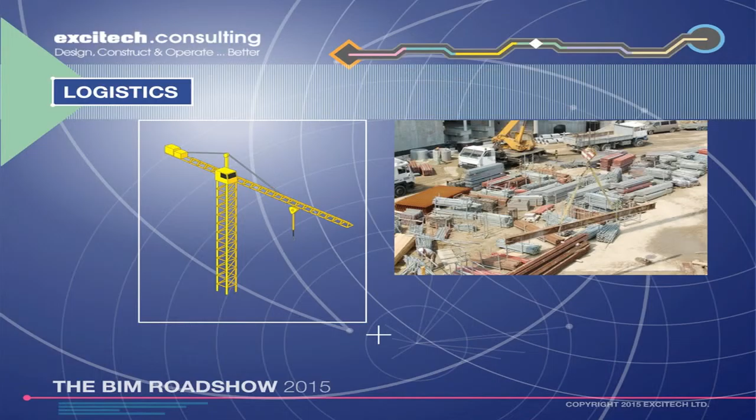And I don't know whether you saw this morning on the Google image, there's actually a lake now on the proposed site. Very nice in summer. We can take our sandwiches outside and things like that. But it proved to me a bit of difficulty, because what that's done for me is actually push my lay down area onto the other side of the site.

Whereas traditionally I'd have brought maybe a mobile crane on site to lift my materials into place, I've now got to install a tower crane. And that's so I can lift the materials over the reach of the lake and bring it back onto the site. So I've got to consider things like this. I've got to consider, is that lay down area big enough? Because if I'm doing off-site modular construction, it's going to need a lot more space than piles of steel just thrown and stacked up. So I've got to take all these things into consideration.

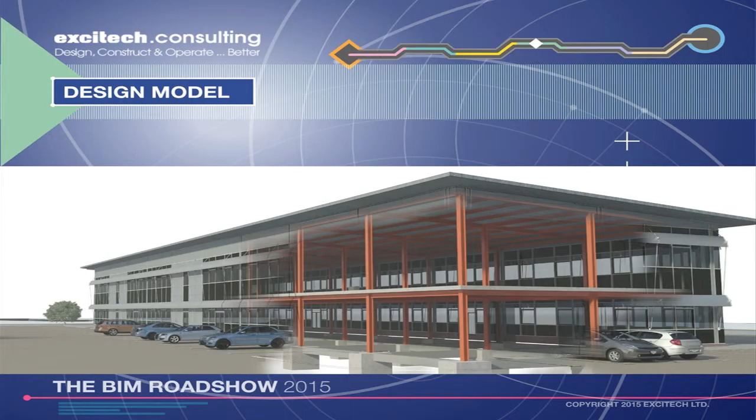But one great thing is I'm actually going to receive a design model. I'm not receiving that pack of A3 PDFs that takes me 2 weeks to try and understand what it's all meaning. I can start walking around this model. I can start getting a good understanding of what this model means to me. How we're going to build it, what's its construction, because some of the information's already started to come in. And I can reuse it for many things, and I'm just going to show you how it's going to help me deliver my bid.

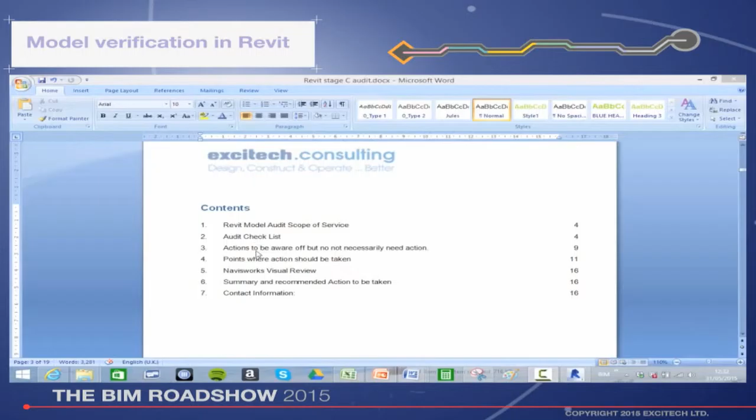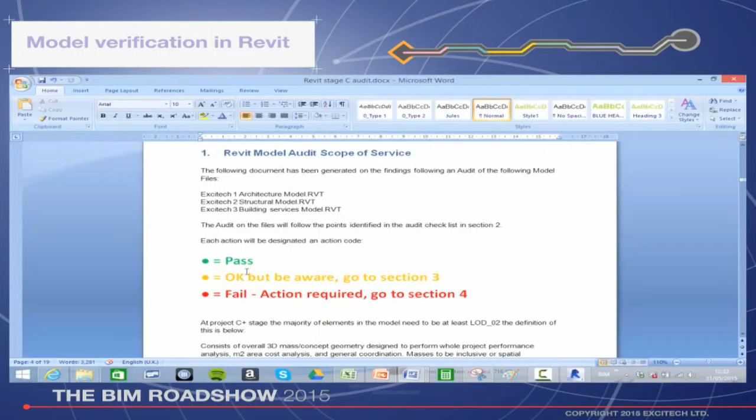But the first thing I've got to consider is the condition of that model. I don't know how well it's actually been modelled, put together, how the elements are put in. And I would do an audit, a full audit on that model as soon as I've received it. And this is even at bid stage. Because if that model has been put together in such a state that I've got to spend the first 2 weeks remodelling things, I've got to factor that into my bid.

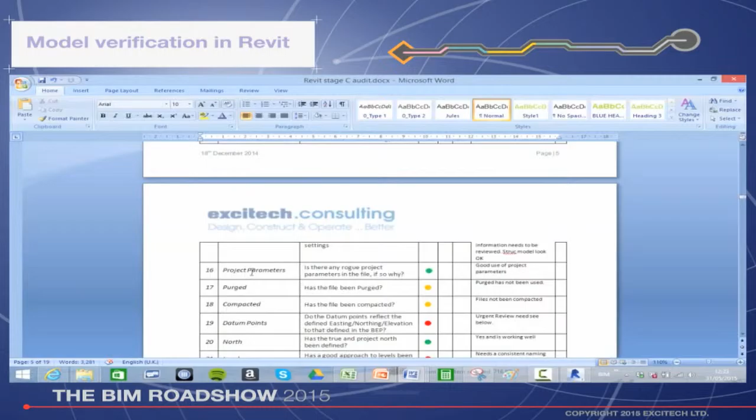If steel columns have been drawn in there from ground floor to the roof, it's not how I am going to procure them. So it'll have an impact if I take quantities off, if I put it into scheduling that I'm going to use, etc. And you can see here I'm using a quick, simple traffic light system to go through main elements of the model. Even things like are datum points correct? Because if they're not, it might look all right in Revit, but if I pull it into other platforms which I'm going to use, they could be splattered all over the place and wrong orientations and all sorts. So I need to consider these things.

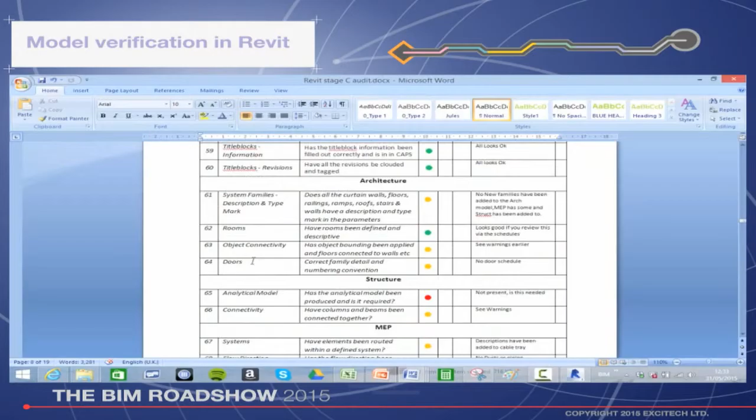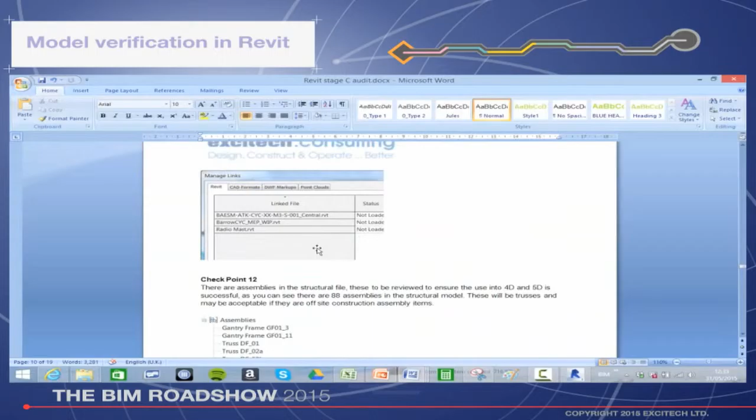So any contractors, who've we got as a contractor out here? Have we got a few? Brilliant. Let's hope I'm not bidding against you, but we'll keep going.

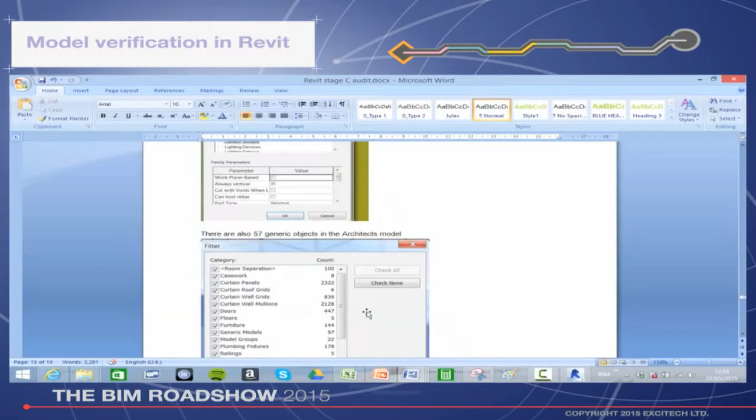Please look at auditing these models when you receive them. Don't just receive them and expect them all to be built the same. Every model's different and been put together differently. And tools and processes like this will help you during your bid processes and taking on work, especially during the construction phase, etc. What I'm showing here now is I've just moved into Revit.

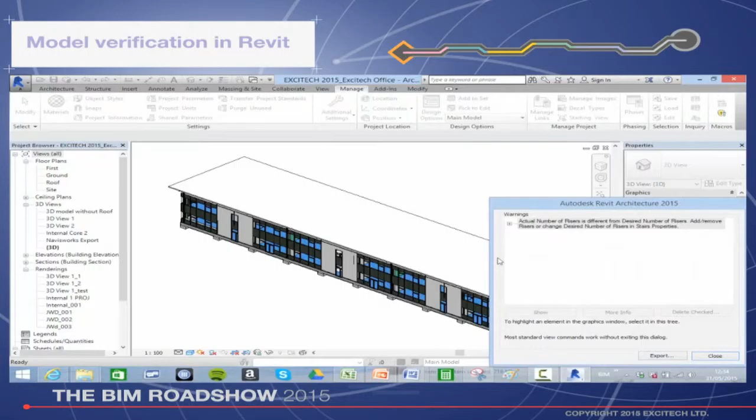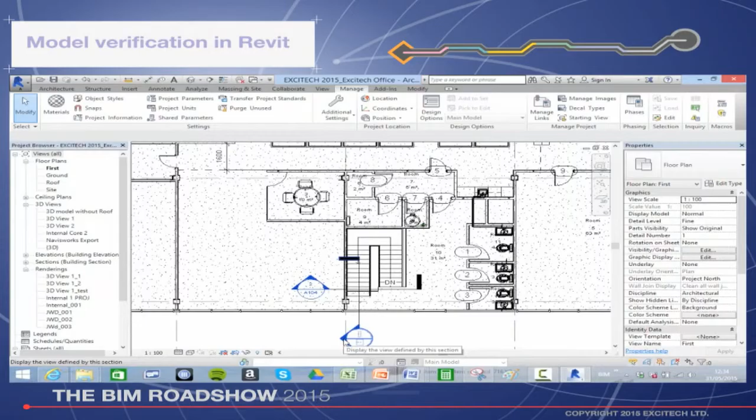Now this is free Revit. Don't know whether you know, but there's a free viewer within Revit. Install Revit, after 30 days it moves into free viewer and the save disables. Great, but what I've got here is allowing me to look at warnings in there, look at problems in that model that I wouldn't actually see. So you can see here the staircase is actually in the floor slab. I need to factor that. Either the architect needs to go back and amend his model because I'm not taking that on, or I need to go back to the client and say, look, you're going to have to put some additional costs in the bid because the model's not in a fit state that I need.

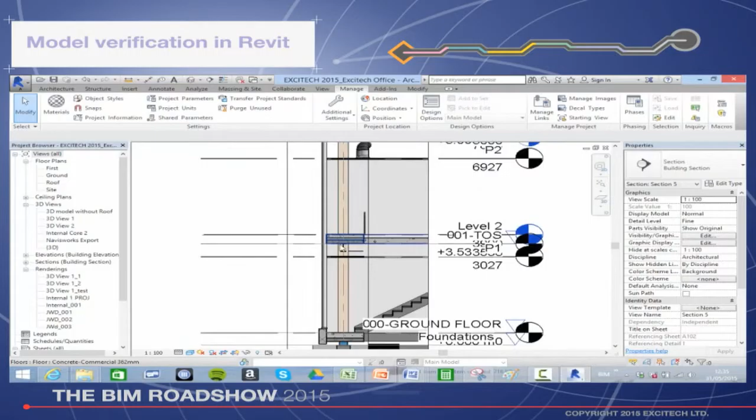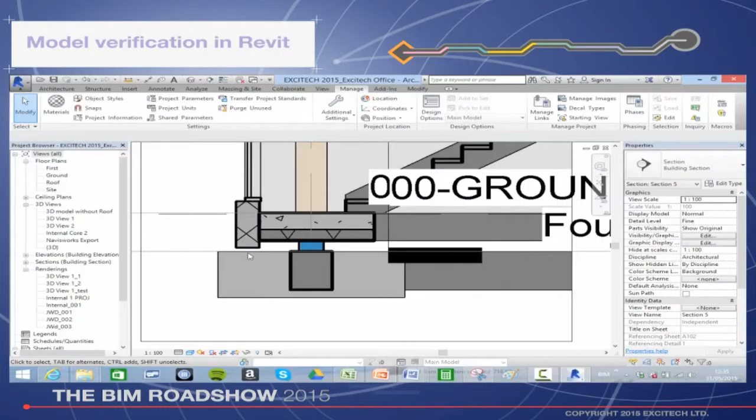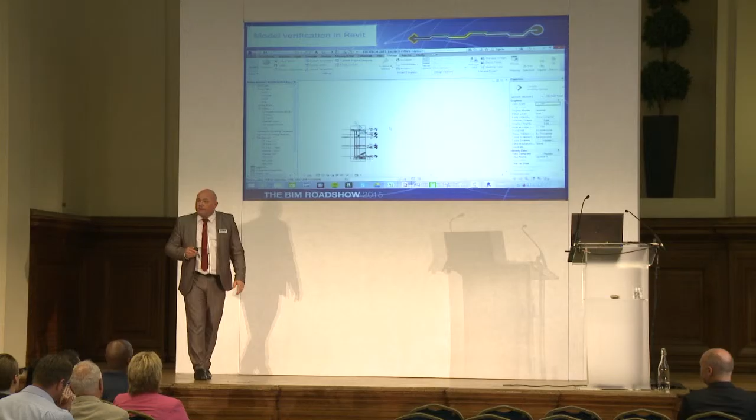I can start creating sections through the model. I can start looking at areas of that model that I wouldn't have any detail of in the past. Things that I'm not clear of, I would be flicking through these PDFs, finding information. I can't work out what that's done. Oh, I'll just put a nominal sum in there to cover that. I can find out that information. And that's key because it's going to help me reduce my costs and improve my delivery. And at the moment, I'm just auditing the geometry and bits of information.

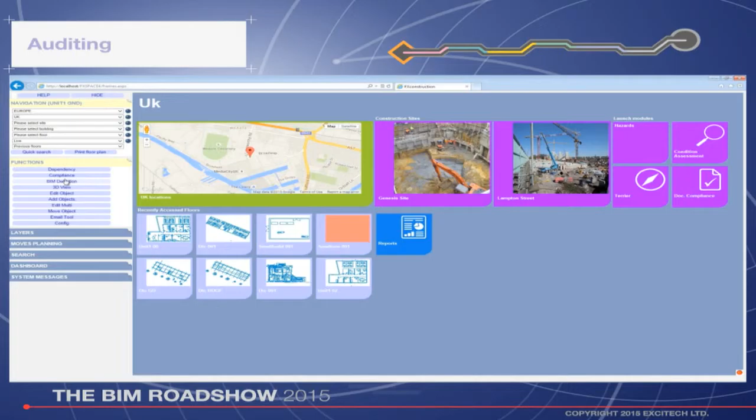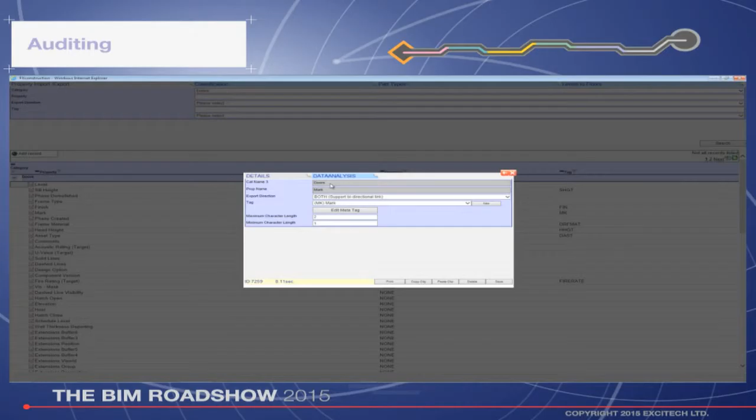Now, I know the client is using something called FXconstruction, so I've looked into that, and it'll actually strip out all the information from a model as well. So I can actually use this to audit the information behind that model. What's actually missing behind there? Not how it looks and how things have been put together, the actual information. The EIR is so specific that it's telling me what information needs to be against what elements and what needs to be against each space. And by using tools like this, it will list out all the information that I require and show me where the gaps are.

I can then go back and either cost for that, because I've got to do it now, or again go back to the architect and say, you implemented an MET, a model element table. You said you were going to fill all this information in for me. You've not done any of it. I'm not receiving this model again. Go and fill it in, and then I'll consider taking it on if I'm appointed.

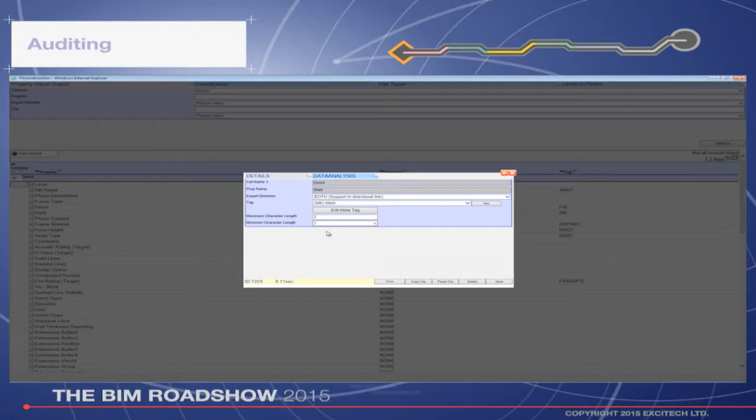So don't think about models as just being geometry and auditing geometry. Look at tools that you can audit the information behind it as well. Because you've got to deliver this at the end as a contractor. And if it's not there, you've got to put that into your bid, into your cost to actually deliver it to meet that employer's information requirements that's been truly defined for you.

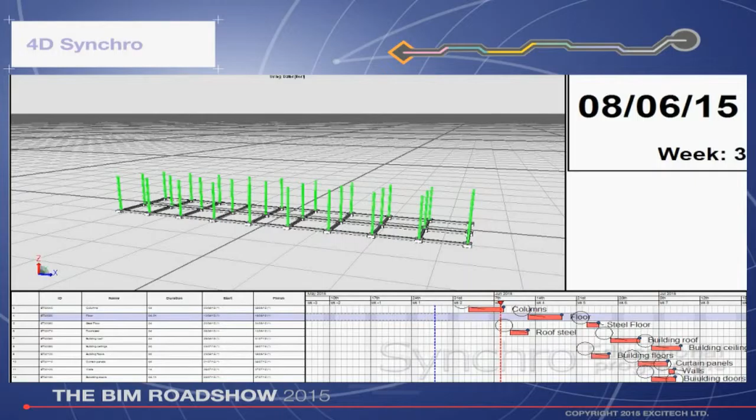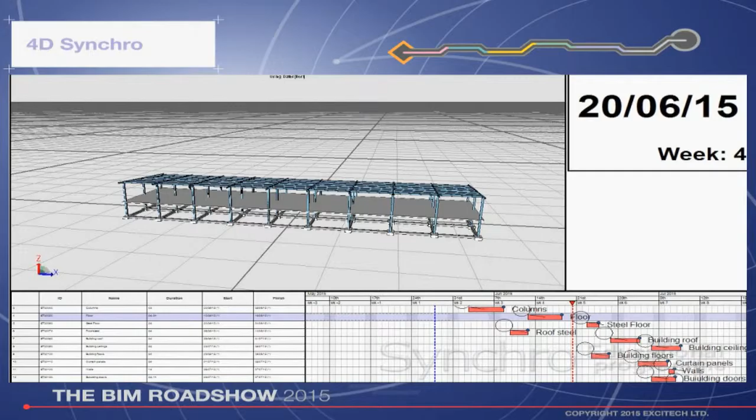Now, we know we've got a tight time scale, 6 months or something like that. Now, this is 4D construction sequencing. What this is actually doing is linking the construction plan, the Gantt chart, with the actual model. This probably took 3 or 4 hours or something like that to do, so it's not a long process. It's just reusing the data again.

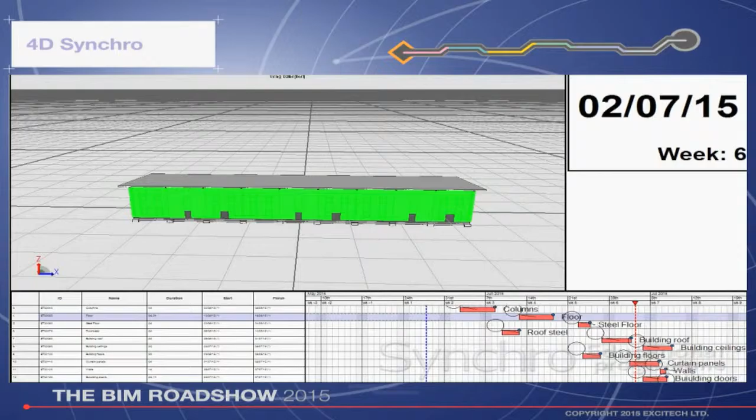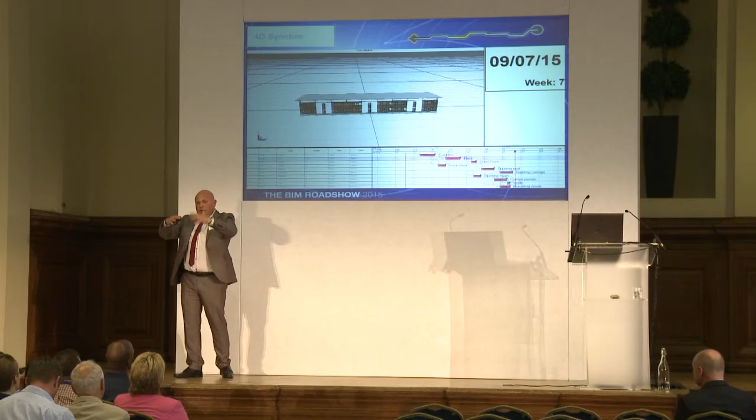All it is is using the Gantt chart that's been produced by my planners, but traditionally, the build of that building was up here in the planner's head. Me as a contracting manager, or the client, couldn't actually get a real good idea of how it was actually going to be built. This is doing that for them now. So this is giving true visual impact and early engagement again to the client, and that's something that we wanted. But it's given me certainty that I can actually deliver this on time, to cost, and meet the requirements. Okay, so great tool. That's Synchro, by the way.

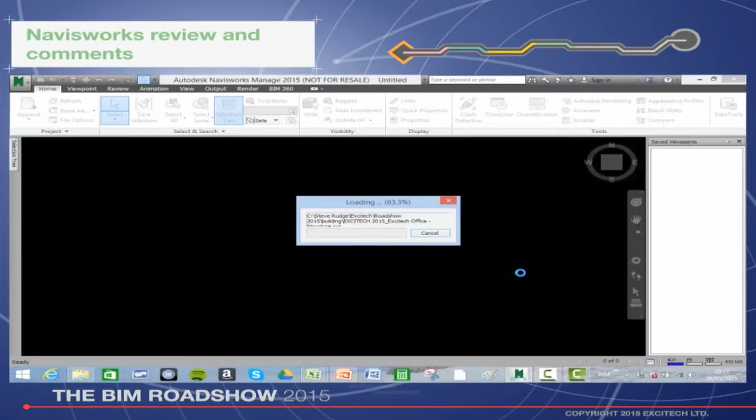Right, one thing I do need to consider is the model. Now, I'm a contractor, so I'm not going to be using Revit. I need to federate these models together, and I'm using here something called Navisworks. Navisworks will read any file format out there in the market and bring it into a platform. Now, what you can see here is what a client could see as well. He can walk around that model. He can start viewing and getting visual early impact of that model.

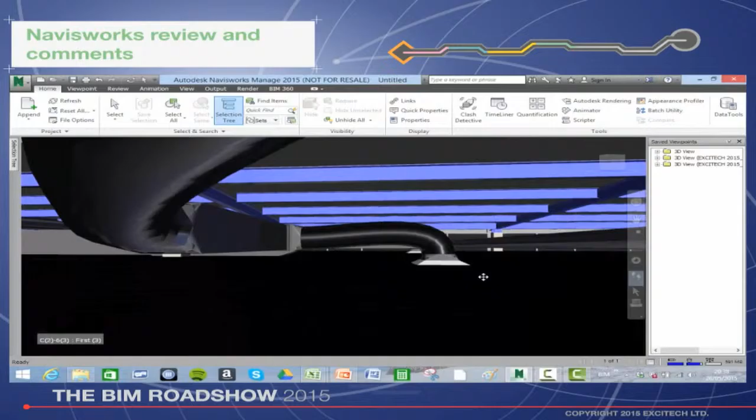What doesn't he agree with? What doesn't he like? We can look at how the services are sat in that void above the ceiling. We can actually drop through and start walking around the virtual built model of his offices. He can start looking at decor. He can start looking at furniture layouts. And even down to the end of the office there, we've got the glass meeting room.

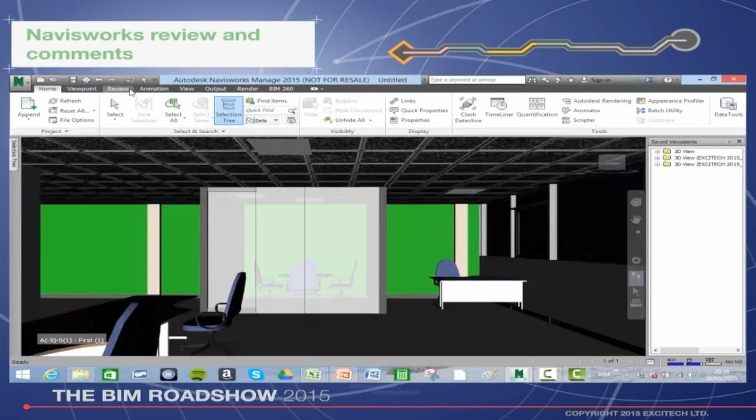What I don't want to happen is actually build that for him to come and walk around site and say, what's that? It's a greenhouse. I'm not having that as a meeting room. Take it down, rebuild it, blah, blah, blah. I've got to foot that cost, and I don't want to do that. So by my client and other people on the project walking around, we're finding problems virtually. We're not finding them once we've built and wasted materials, etc.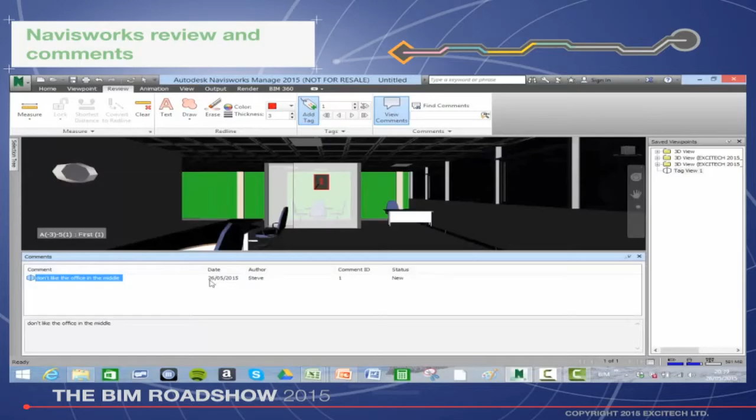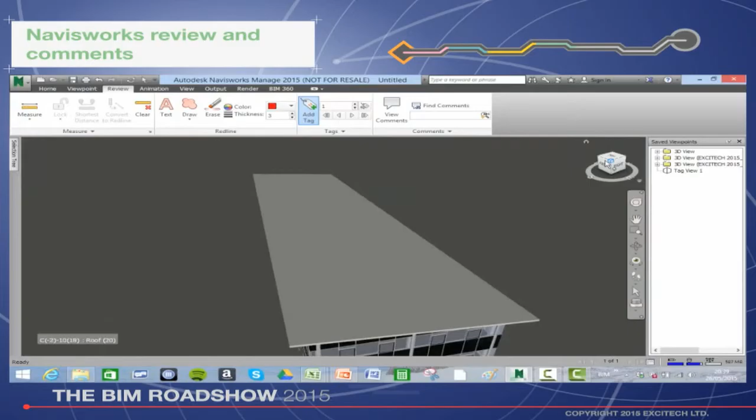We're resolving it. And what we're doing here is allowing the client and the whole team to actually mark up and review that information. So we're adding tags here, and this is fully auditable, so you can see who's actually made the comment. You can audit that and make sure it's resolved. As soon as I've done that, the architect can see it, the structural guys can see it. We can move those elements around. But more importantly, that client engagement's key.

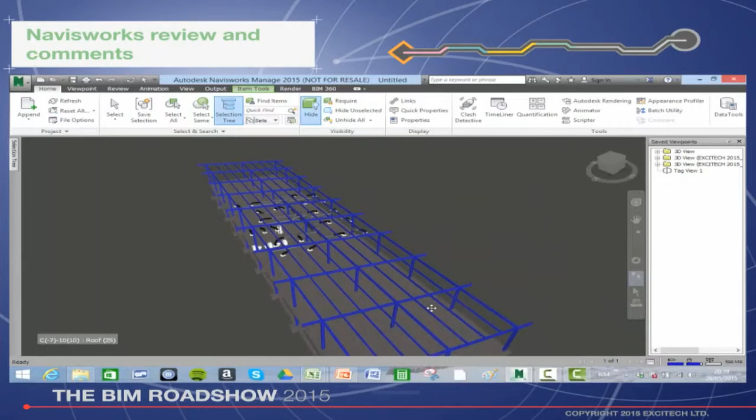Another thing I'm doing here is the client can actually just pick one model. I've actually here just switched off the whole of the architect's model, so we can start seeing the structural frame and the services within that building very, very easily. Something like that is information you would never, ever be able to see in the past. And he's actually able to walk around that as well and see comments. But I can do that as well.

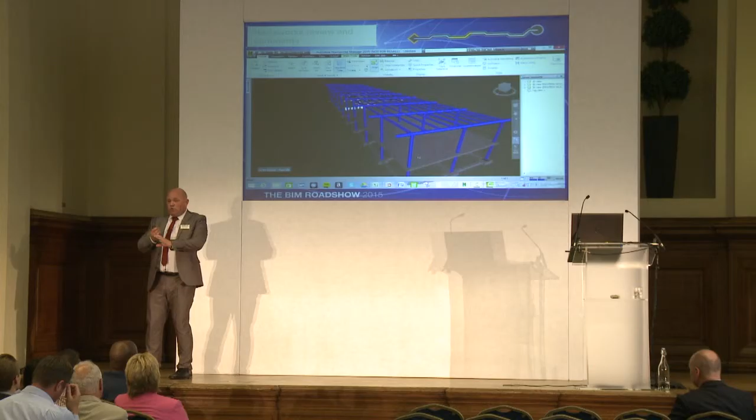So it's going to help me reduce my waste and problems, because I don't want problems on site. I'm up on my safety. I don't want any errors on site. And more importantly, I don't want waste. The other thing that's so important to me is clash detection. Now, this is a huge impact to me because this is really going to reduce my waste. And this is a clash matrix.

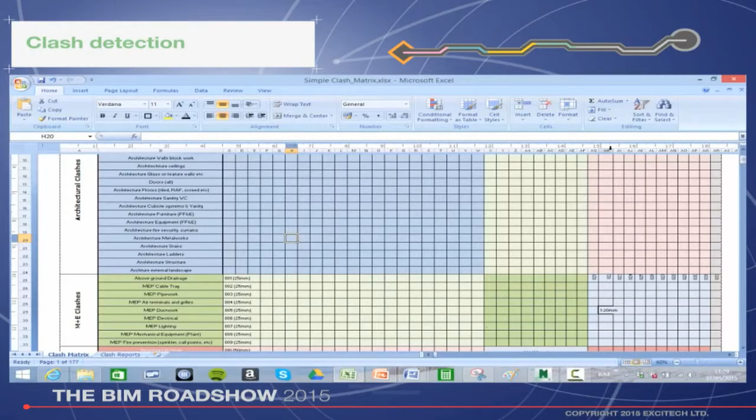What we've got here, on the columns you can see on your left, are all the elements in a model, and that's replicated across the top on a horizontal. Again, all the elements. All we do is pick one horizontal against one vertical and pull it together. There's the marker. This is clash number 1, and we'll put a tolerance on it.

Now, the tolerance I'm going to start with is probably 200 mil, because I want all the big problems sorted first. I don't want to start at 3 mil, because I'll end up with thousands of clashes, and I won't be able to resolve them. So start at 200 mil. And I've actually picked ducts against columns, so they're my 2 elements.

What I'm doing here is using something called a search set. It's allowing me to find all the columns in the building. The top there, columns, I'll select find all, and it just finds all the columns in that model. That's my first criteria. Against columns, I want to actually clash all the ducts. So I can do the same again.

I can save this one off first as columns. Now, anybody who's used Navisworks, if you're doing this, use search sets, not selection sets, because a search set will update as the model updates. If you use a selection set, it's rigid to the things you've just selected on that day. So you think you've got clash-free models and you forgot about the 20 new columns that have actually come in.

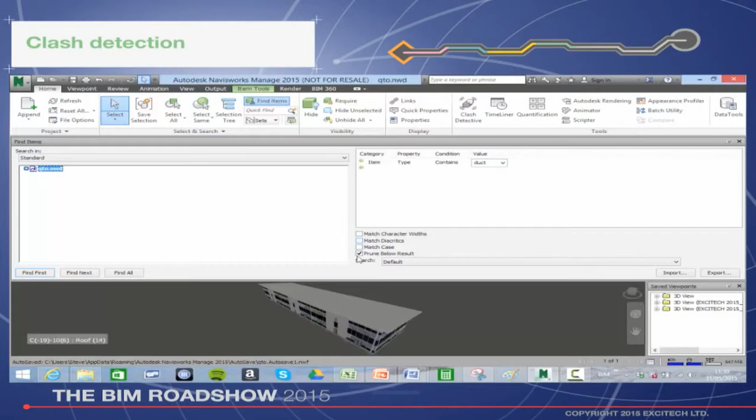So use search sets. So I'm doing the same again for the duct. Building that duct in, using the searches, finding them all, hiding off things that are not selected. There's all my ducts. So I've now got confidence that the model has been filtered to find just columns and ducts. So now what I need to do is save the columns away. So you can see there, columns and ducts, we're ready to go.

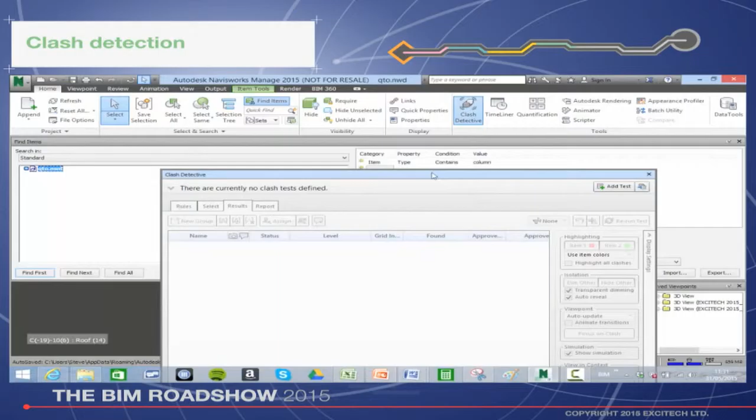Now what I need to do is run Clash Detective. Now this is in Navisworks Manage. And the Clash Detective here will actually run all these scenarios. So that clash matrix, you could start with 20, 30 different clash protocols going and gradually build up. I've got projects going at the moment. They've got like 350 different scenarios of things clashing against each other.

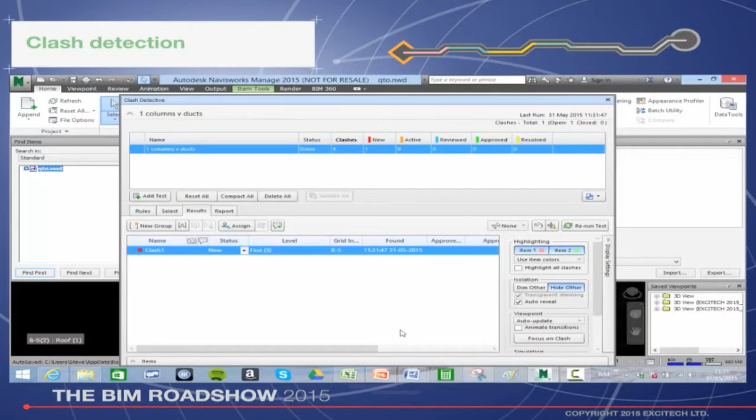And you can see now what I'm doing here is picking clash number 1, columns versus ducts, and I'm now going to pick the 2 search sets. And you can see search set number 1, there they are, columns, search set number 2, ducts. Tolerance, done, run it. Michael's done a great job, I've got 1 clash. Yeah, that'd be amazing, wouldn't it?

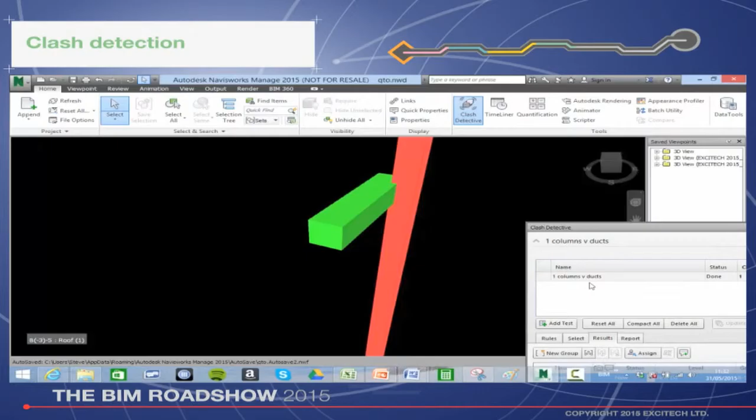There's the clash. Right, I can see it, I can visually see it, I can mark that up if need be. But most importantly, that can go straight back to the design team to resolve that error before I order any materials. So that's allowing me to get better cost certainty all the way through my delivery and hopefully reduce what I need to cater for and consider in my delivery and bid.

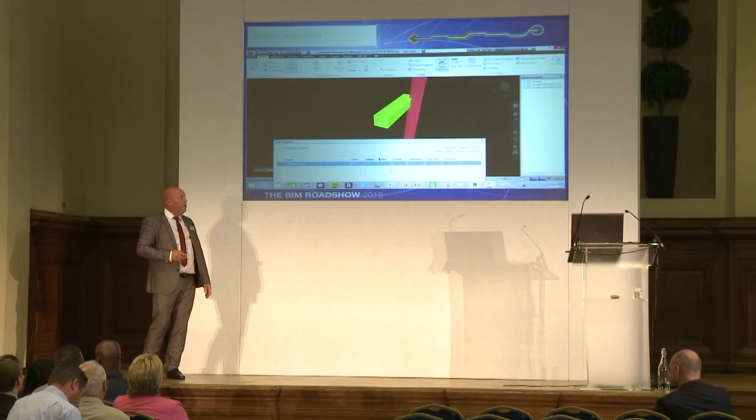Okay, so the other thing we need to consider is the quantities. Now, are there any QSs amongst you? One. Hello. We had a few in the other one, so I kept all my jokes quite minimal.

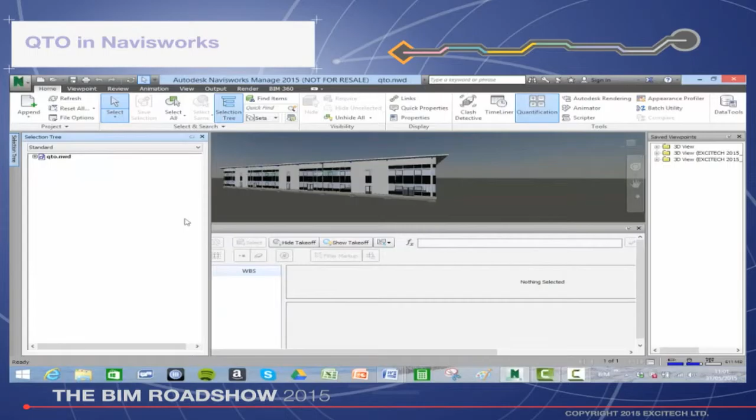So, quantity takeoff, yeah? What's great about quantity takeoff now is I'm pulling the whole model and just stripping it straight into a workbook. And what it's actually doing is filtering everything, because everything's intelligent now. It's not lines, arcs, circles, all put on layer 0 and everything's all blocked together. Things are actual objects. So it's a virtual build of this building. And it's actually filtered it into the specific naming and brought it over here.

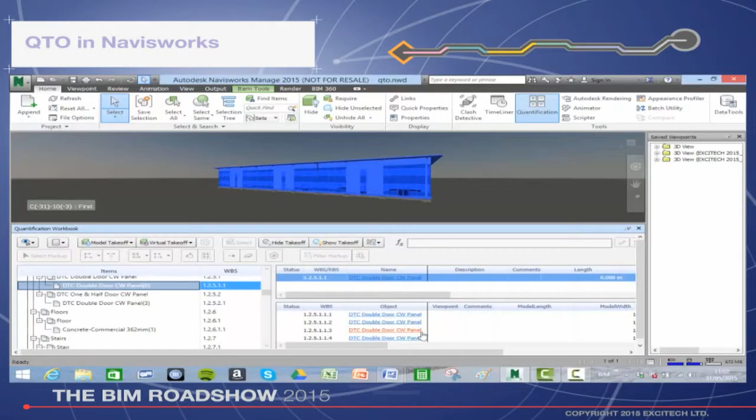So you can see each wall's defined, the length of the walls in there, and also the total of the walls in there. Now this can be stripped straight into Excel. So it's not taking the role of a QS, it's just making them more accurate and giving better cost certainty for myself when it comes through for costing. It's allowing me to capture that true data that's sat in that model.

So traditionally, it had been a PDF, highlighter pen, scale rule, and an Excel spreadsheet. And we've counted 50 doors. I probably need to order 53 just in case they've missed a few. I don't now, because hopefully we've captured it all. The model's checked by that many people, we'd have found problems if a room was there with no door to access it and things like that. So great tool, very easy to use.

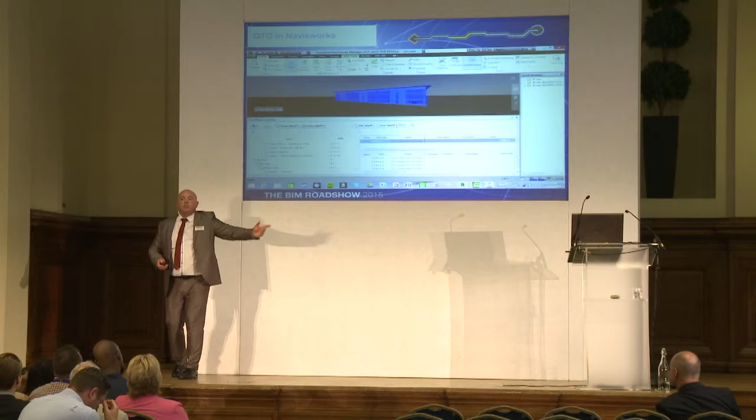But just think where it's going to. It's not going to do everything for you. Take the objects off, push it into Excel, and look at your traditional processes of estimating and bringing those costs together for delivery. What I'm showing here is, again, the free Revit viewer for a contractor, which is great because I don't design author, so I don't need it. And I'm producing another schedule in Revit, and this is a material takeoff schedule.

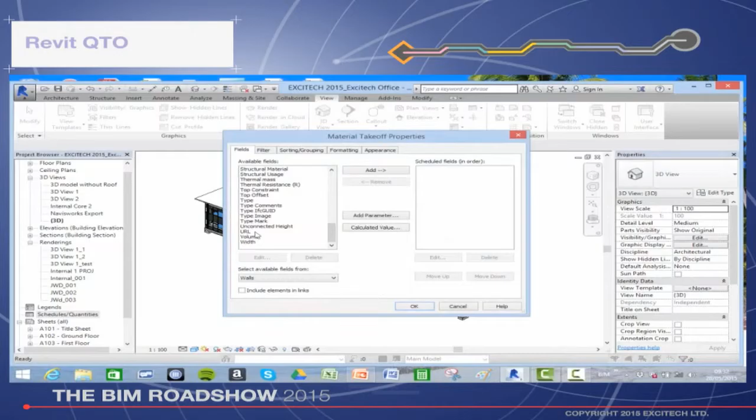Now, the QTO in Navisworks is pulling out a type of wall, which is, say, a basic wall, which is brick, cavity, block, plaster, paint, skirting, but it's just called a basic wall. What this is doing is stripping it into the materials that wall's made up of. And you can see here, it's probably quite hard to see, but it's actually broken it down into plasterboard, into some studded material, all the skirtings listed there, and we can sort that out, put a filter on it,

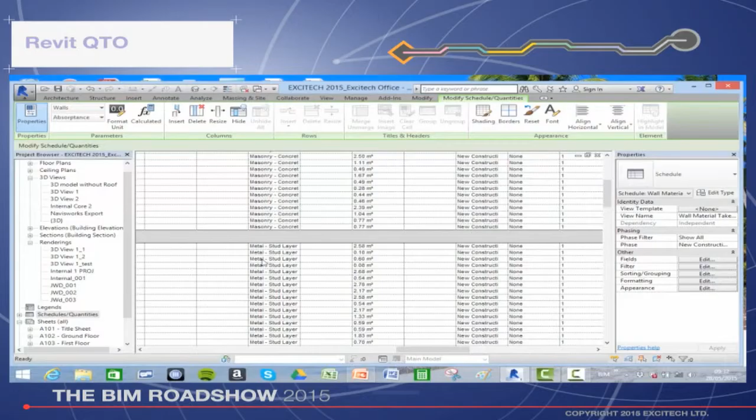and put grand totals in. So I'm not just looking at high-level walls now, I've actually got into the true materials that are being put in by the architect. So I've taken it down granularly to that next level, and I can use those 2 different bits of software. Hopefully they both add up the same, but it'll help the QSs and people like that to get more confident in using this technology.

Okay. So that's just a few of the tools that I'm going to use during my bid process to help me deliver a lower price to hopefully win this bid. But there's a few things I need to consider because I've got this EIR in place. And one thing I really need to look at, that EIR is specing that all the models need to be delivered in Revit. As we know, Revit's a great design tool, but push that into the subcontracting space, manufacturing space, it doesn't go to the detail for the

manufacture and fabrication. So what happens when I've got that steelwork connection, because traditionally it would have probably gone to my subcontractor and the connection plates would have been done in Tekla. I'd have gone to my MEP design team, great, done it in Revit MEP. Passes again to my subcontractor, what happens? They redo it in CADduct or Fabrication MEP.

So I've got to take into consideration how I'm going to capture all this information and how I'm going to get it back into that Revit model, or capture the information in other means and other ways to fulfill the requirements of my client, who wants data-rich models passed over into that FX360 CAFM system at the end.

And if you look at the asset information, you can see there's a list here. That list isn't in Revit at all. That's fabrication, that's manufacturer's information. Where do I capture that? How am I going to capture it? So I just need to factor that into my costs and my bid as well, just to make sure I've got it covered, because it's me that's got to deliver that to that client at the end of the day. And it's all about data. Yeah, BIM is data-rich modelling.

And there's one thing that we've not talked about all day yet, and that's COBie, Construction Operations Building Information Exchange. Why? Because we don't really need it on this project. We've got a client who's really defined his requirements. He's defined what information he needs to capture against spaces and against elements, and how that information is truly detailed. That's why we don't need COBie.

If the client came to me and said, we want BIM, we want level 2 BIM, blah, blah, blah, I'll have COBie because I don't know what I'm doing with it at the end. That's when COBie comes in. If you've not got a true defined delivery, you don't know what information needs to be collated, we don't know what CAFM system it's going into, COBie is a lowest common denominator, which is an Excel spreadsheet. And it strips out the information from the model and populates this Excel spreadsheet via IFC files and other formats.

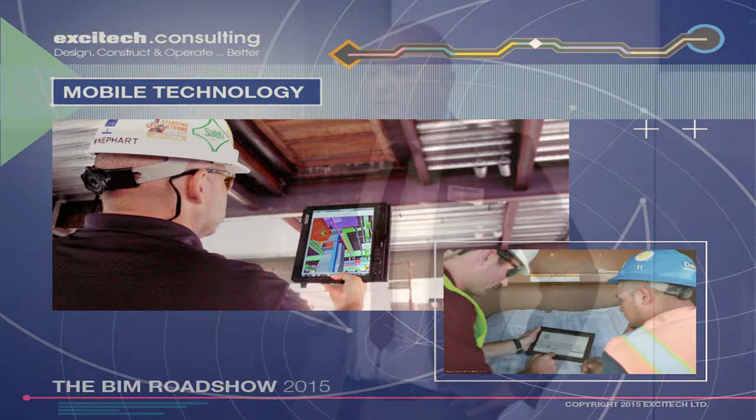Other things in my bid: I'm going to put in there that I'm going to actually use mobile media, mobile technology. And this is great, really, because I'm trying to move my whole team and my supply chain away from just using paper. I don't want to start rolling paper out on the concrete floor, getting all dust and everything else. I want to use the technology that I've already got at my fingertips and I can reuse again. And it's going to engage everybody in the project.

Now, we know the client wants early engagement. He can see the information that's being collated. He can see what data I'm collating against his assets at an early stage. If he's not getting the data he requires, he can tell me and I can adjust, rather than wait until the end, and I've got a huge job to collate different information that he wants.

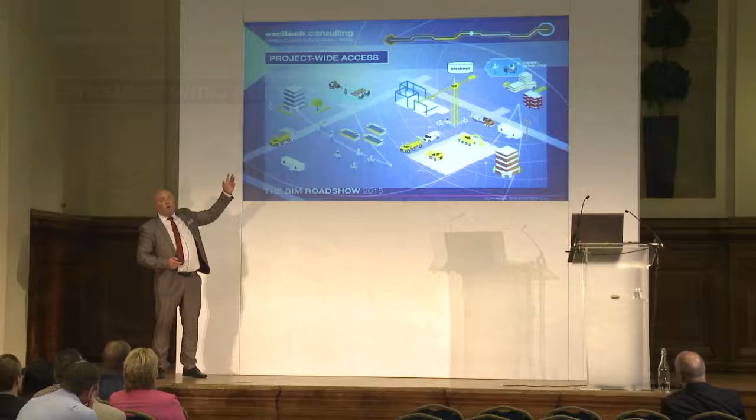It's also going to look at my construction management team, because they can see who's creating all these issues. They can see who's creating the snags on site, but actually who's not closing them out again. Who's causing all the problems? Because everything's recorded in this system and it's visual to everybody. Even the project managers can start seeing what's happening. So they can get early engagement and see if there's things that are going to actually impact on the delivery and delay what we're actually going to push out there.

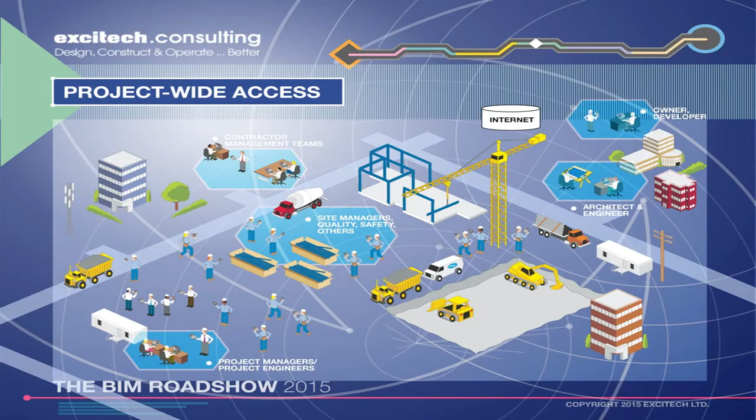And right the way through to the architect. So if there are things collated, problems, things not fitting, whatever, the architect can adjust the models very, very quickly before I get things procured or fabricated off-site. And even down to the site people. So the Field system will put in a QA procedure for me, which will tell me what things need to be done as I'm doing a task.

So if I'm installing a pump, I need to do these things before I commission that pump. So it's going to improve my health and safety and improve my quality on site. And that's really key because it's these guys that will be using it.

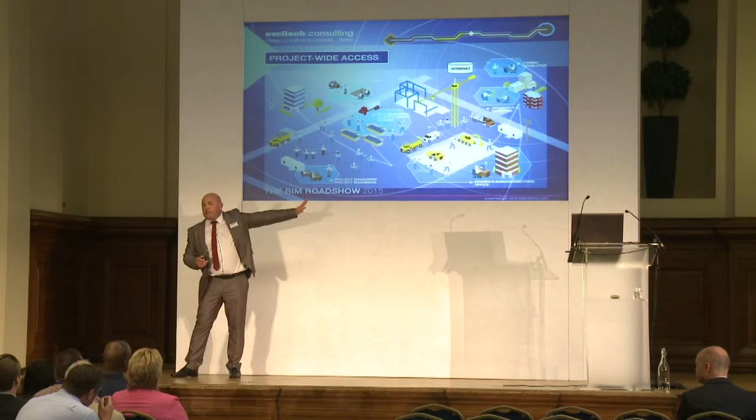Yeah, I worked on a job and actually the client used it as well, and he walked around site with the mobile technology and finding problems, and he was doing his own snagging while he was using this mobile media technology, which I thought was quite unique, but he got really involved in the project and he loved it. And it was just a key differentiator for him.

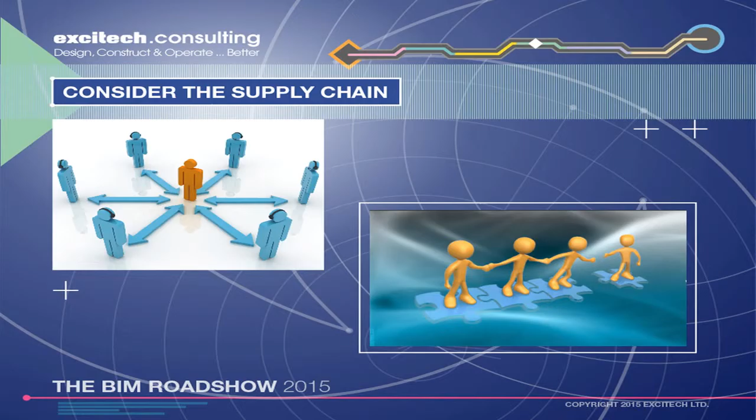So I do need to consider my supply chain. If it's broken and they don't provide me the information, I've still got to get it to the client somehow. So if I've got two bids of similar price and one's offering me 2D PDF only, and the others are saying, well, I'll model and give you data-rich information, I'll input it into Excel for you, blah, blah, blah, who am I going to go with?

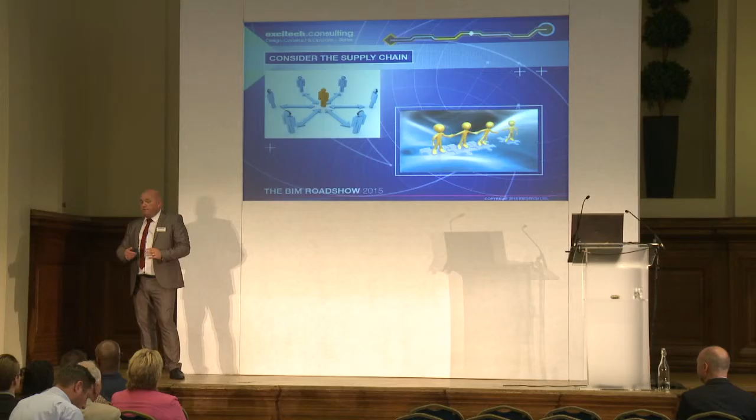So I've just got to consider that, because there's huge risk on me delivering the project but not meeting that EIR. And that's part of my bid, so hopefully, if I'm successful after lunch, we can have a look at some of that technology and some of the field systems that I'm going to implement.

Now, to finish off, I spotted in that EIR one thing, LOD 500. Anybody heard of it? Yeah? As-built verification. I have to deliver an as-built model at the end of my project to that client. Yeah? Great. Because what that means is I can't deliver my traditional drawings that I used to, because they weren't really as-built, they were for construction models, and there were a few little errors in them and things like that. I can't do that anymore. They want as-built models.

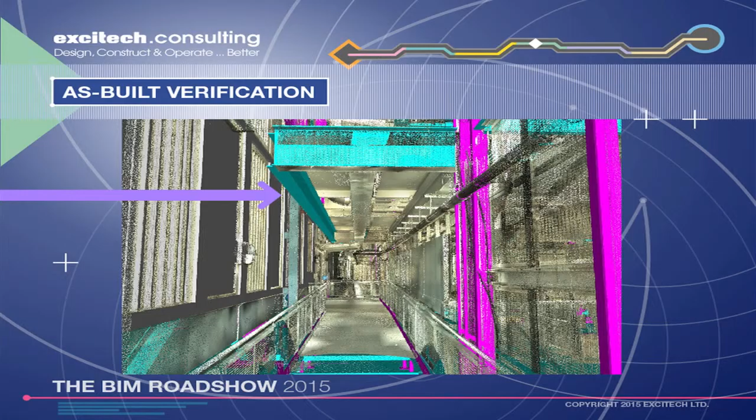And this image is really just an example. So you can see the beam here. That's the beam in the model. I've actually laser scanned it, point cloud scanned it. And are the guys from Plowman Craven around? Yeah, 2 guys there. If you want to know about this stuff, go and have a word with these guys at lunch. Great guys, and they'll tell you all about this.

But the point cloud is capturing that area. Yeah? And the beam is actually there. So I now need some form of process put in place to amend the model to move the beam into its correct location. That's when it becomes LOD 500 and true as-built.

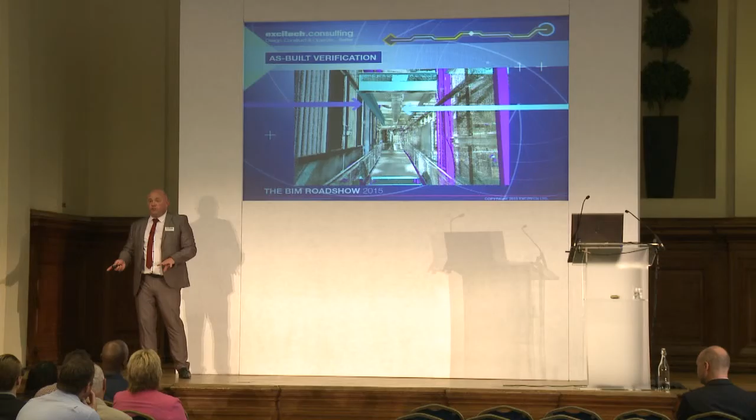Because what I don't want is the client to grab the model when he gets the old brown patch on his ceiling and say, oh, there's a duct above there. So he goes and orders some parts, and when he actually drops his ceiling tiles, it's a pipe. And he's ordered the wrong things. So that's why they want it as-built. They need to know what's where in the right place so they can manage their buildings better at handover. So just be aware, anybody looking at LOD 500 delivery, that needs to be considered.

So hopefully I've just shown you a few things that I've looked at in my bid and some of the technology that's helped me. And the way it's helped me is because I've been able to receive this data right the way through and passed over to me at this early stage. So hopefully after lunch I'll be successful and I can take you further on the journey and show you some of the field technology and some of the good stuff we're using in there. So hopefully see you all later.

Thanks, Steve. Okay, just a couple of points very quickly. Certainly for the architects and design teams in the audience, I guess there's a health warning there. If you're going to be working on a project where the contractor is going to audit the model in the same way that Steve has done, then you need to be very confident that you've got some very robust audit and verification processes in place to make sure that the model you're going to hand over is going to be fit for purpose. Because certainly I can imagine your client is not going to be best pleased if it turns out not to be the case.

We're going to break for lunch now, but I won't keep you in suspense. Steve is going to win the bid. You knew that, didn't you? 2 factors. Contingency was massively down on his competitors because of the work he'd undertaken and the confidence he was able to demonstrate through his QTO and clash detection, etc. And the second point, as we've seen from the client, he likes to be involved. And Steve, with his visualization tools in Synchro and Navisworks, has demonstrated to the client that it's perfectly feasible for that client to be involved at the next stage.